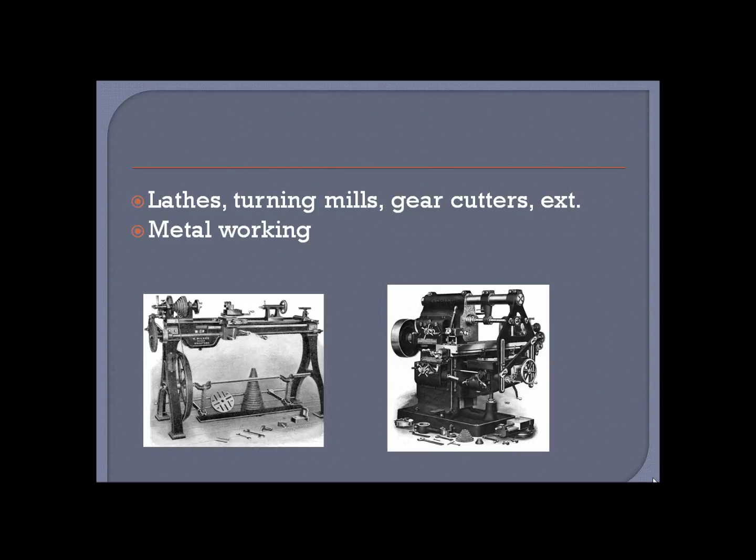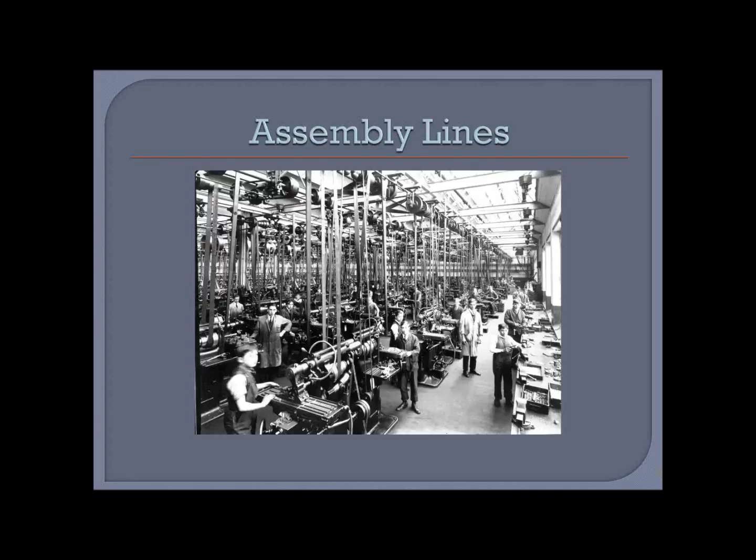Lathes, turning mills, and gear cutters had already been put to use from the late 1800s for industries like bicycles, sewing machines, and typewriters. America began entering this age of mass production after the Industrial Revolution, and metalworking became a crucial focus. By the 1920s, assembly lines such as the ones created by the Ford Motor Company put these machines to use and made the widespread use of complex products a possibility.

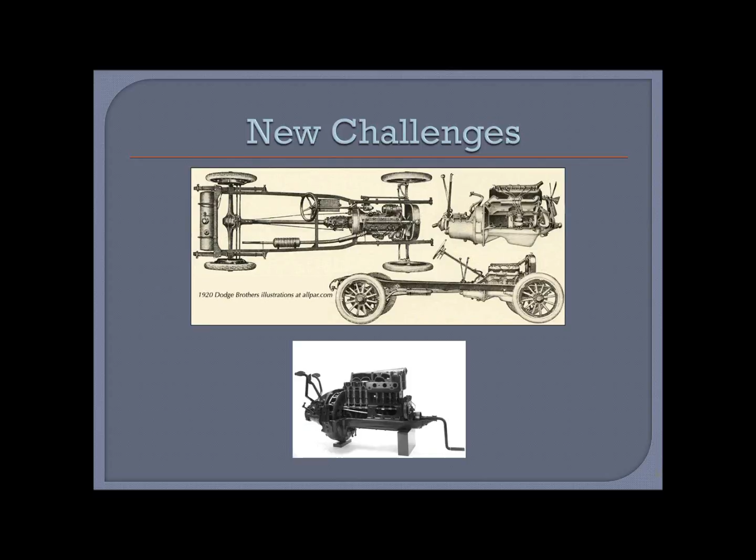The volume and speed of manufacturing, however, was still dependent on the machine's capabilities. Automobiles, planes, and telephones began to demand increasingly more complex parts. Fast forward 30 years, and after 2 world wars, the demand for speed and intricacy in manufacturing surpassed human capabilities.

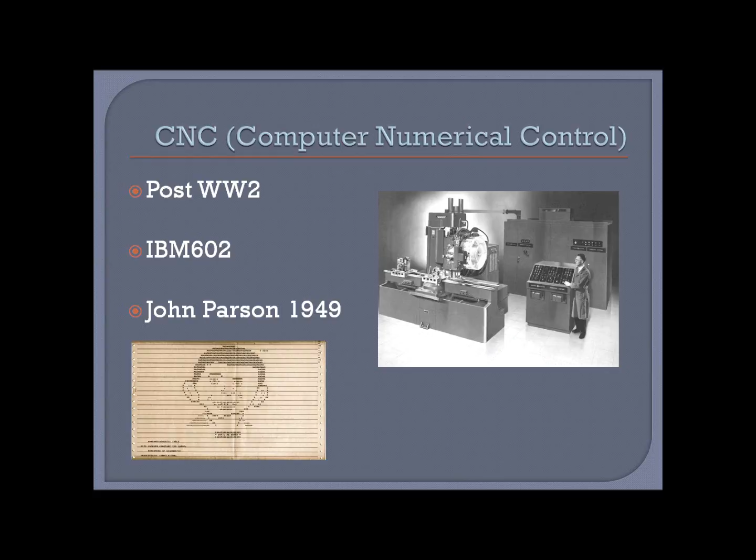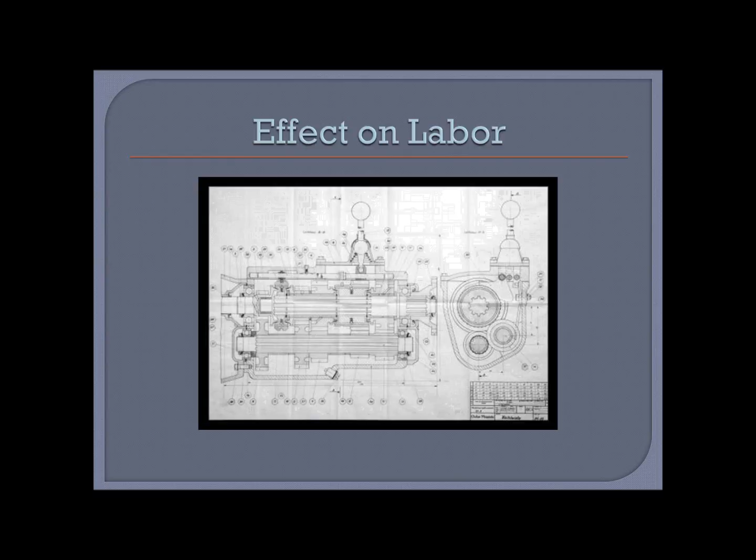In 1949, John Parsons created the first computer numerical controlled device. This paved the way in automation. Manual operation of these machines was no longer necessary, but rather a set of inputs and a press of a button, so to speak. Much of the labor force involved with part drafting, blueprints, and operation became obsolete. Processes that involved intricate measurement and skilled precision were reduced to a set of numerical inputs.

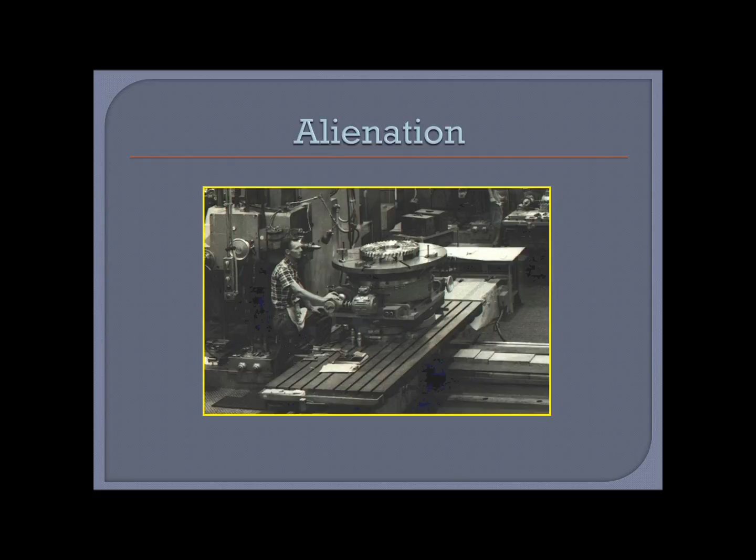This caused an alienation of labor. Rather than controlling the machines, people only needed to do the initial setup. This diminished the aspects of creativity, personalization, and individuality. The more specialized these machines became, the less work needed to be done by the operator. Machine operators became less of a unique skill set and more of a blue-collar job.

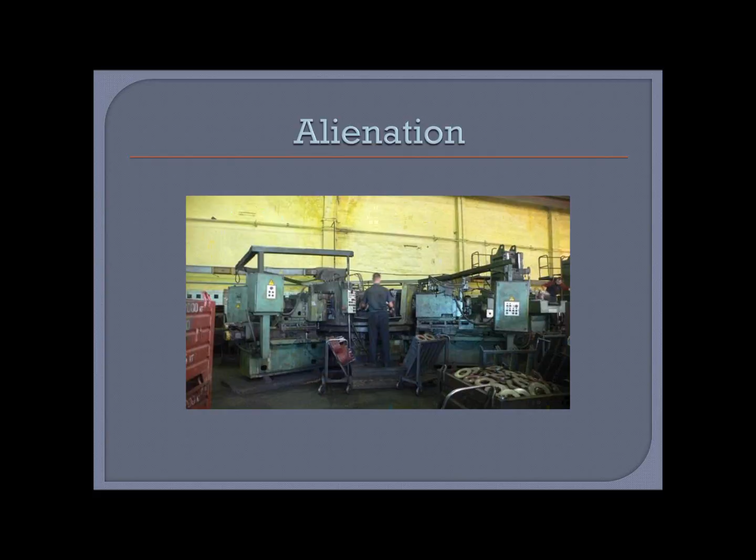In contrast, mechanization of machining processes also brought with it new specialized jobs. These required increased schooling and education, with an increased emphasis on math, physics, and science. This automation and level of production created a demand for power technology, processing technology, material handling, material cutting, and control design.

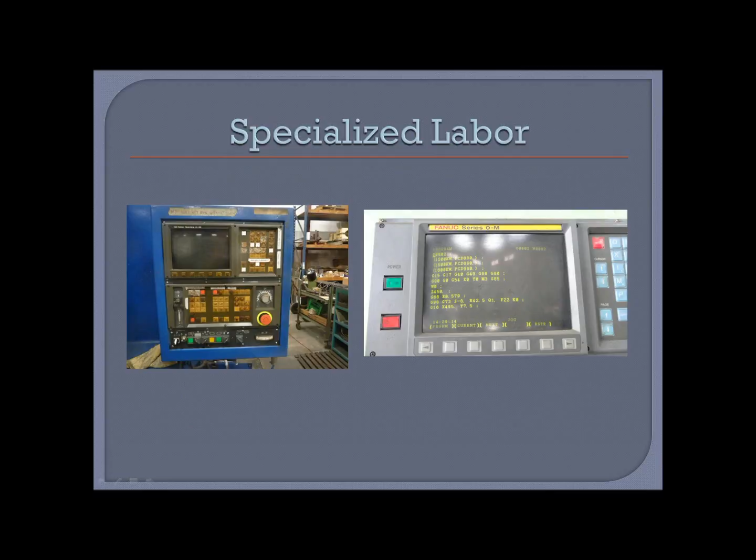Widespread machine use and capability made what some people refer to as the Second Industrial Revolution possible. This Second Industrial Revolution was marked in history by a boom in electricity and mass production. Just like engineering became a rising profession in the First Industrial Revolution, with the manufacturing of steam locomotives and increasing use of electricity, this second revolution coincides with a spike in engineering and other technical careers. Subdivisions in engineering were required to branch out into areas like aeronautics, telecommunications, and chemicals.

The IBM 602 machine, as discussed before, was the first numerically controlled device. It was a major stepping stone making way for the vast new field of programming. Once data could be stored within the computer's memory, programs could be shared and easily duplicated or dispersed. Programming would eventually be used in countless manufacturing processes and used to impact our everyday lives. The IBM machine's applications and programming technology were quickly accelerated by its incorporation into computer automated manufacturing.

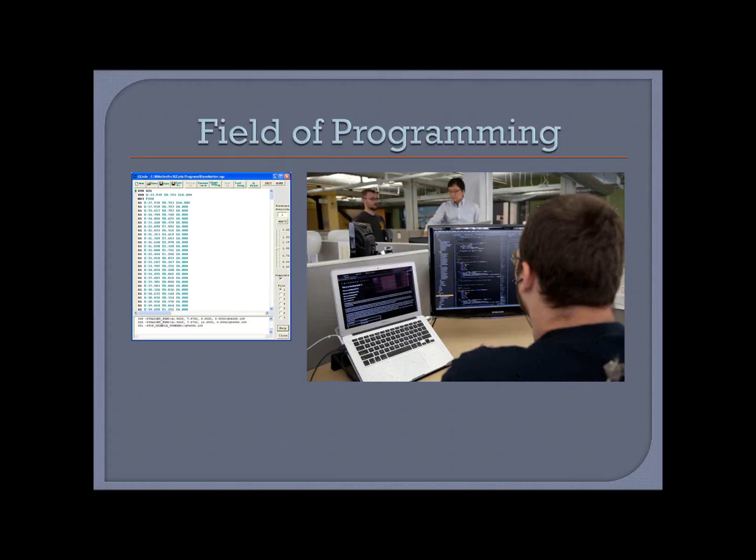The ability to make recreatable identical parts became crucial. In the ongoing trend of increasing efficiency, standardization within American business became an ongoing goal. CNC machines brought standardization in a coding language called G-code. It also created more industrial standards in areas such as tolerancing, part quality, and materials used. This promoted fast and efficient communication between manufacturers and businesses, not only within our nation, but across seas as well.

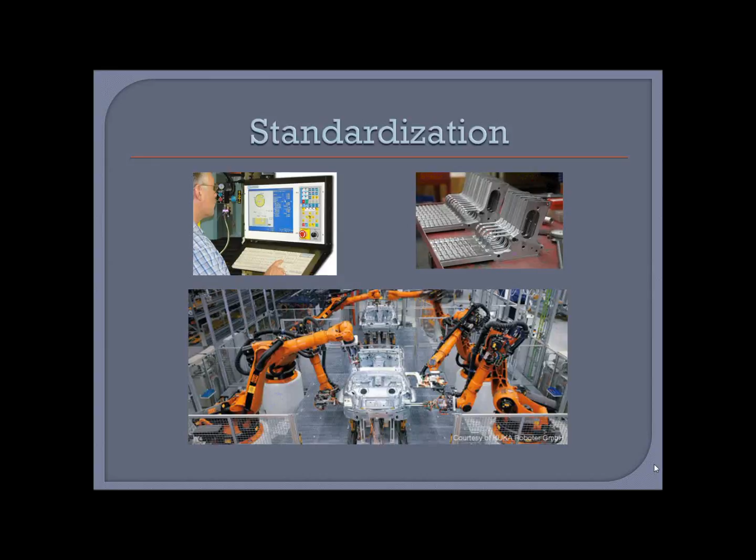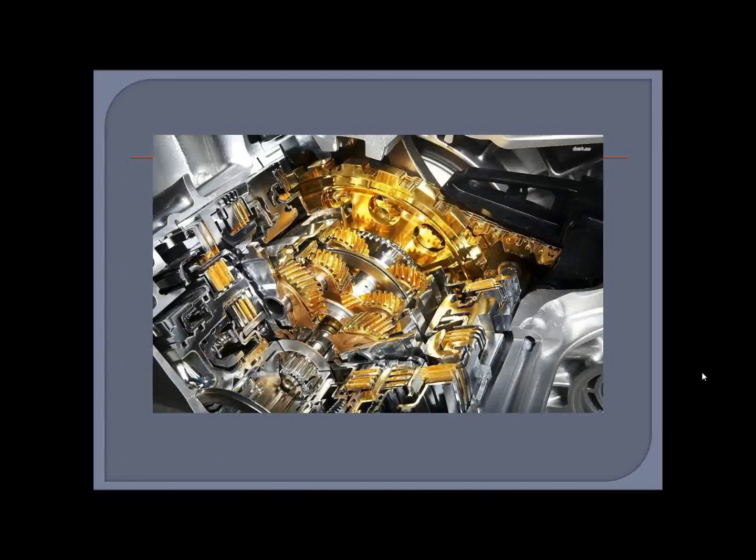Tremendous growth in productivity, transportation networks, and industrial production lowered the price of almost all goods. The economic backlash of such growth and reduced costs led some businesses to fail, along with periods of economic depression. The working population in agriculture fell during this rapid industrialization. Urbanization increased and employment rates were higher within cities involved with mass manufacturing. It is safe to say that machining capabilities have allowed us the standard of living we are accustomed to today.